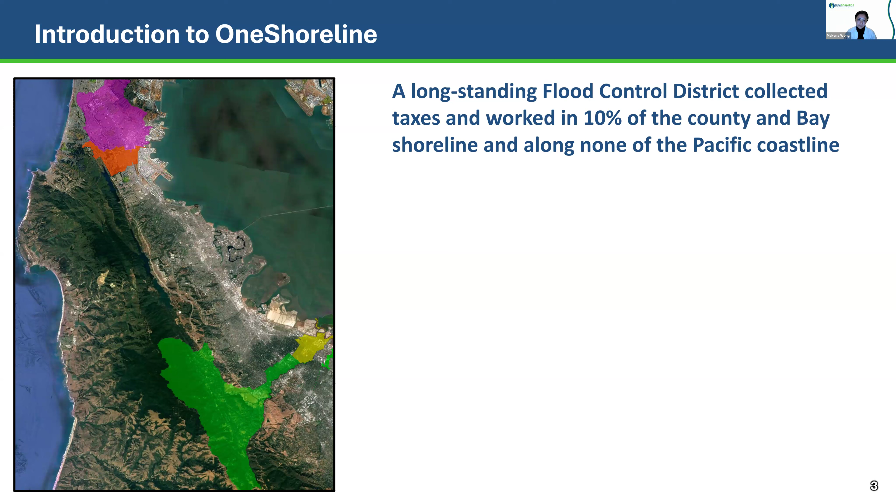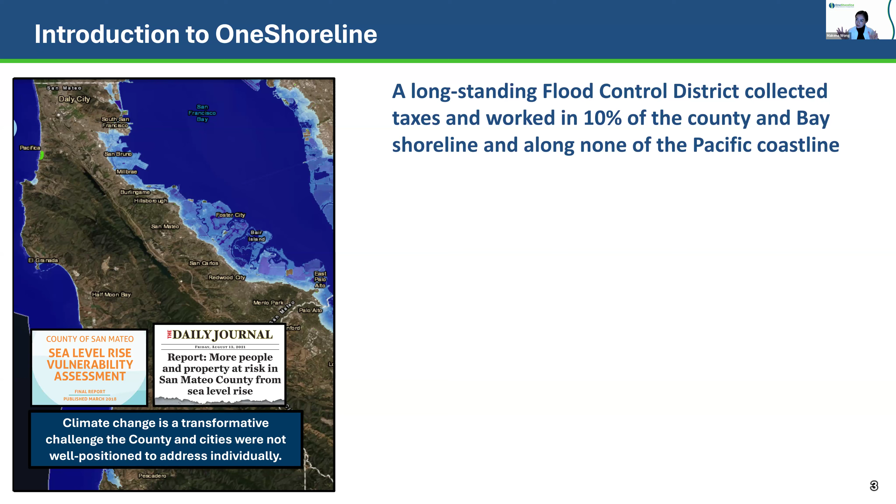When the county completed a sea level rise vulnerability assessment in 2018, findings showed that San Mateo County, being a peninsula surrounded by water on both sides, is actually the county in California most at risk from sea level rise in terms of people and property in the floodplain. It became clear that climate change was a transformative issue that the county or cities individually were not equipped to address. This led to a call to establish a special district working across jurisdictional lines to address the issue head-on. In response, state legislation established OneShoreline on January 1st, 2020.

So we are four years old, almost five, and the first independent government agency in California focused on building resilience to the water-related impacts of climate change. That's intentionally broad because we take a holistic approach in all our work. First, a holistic approach to threats: flooding and sea level rise are in our name, so we're very focused there, but also coastal erosion issues and more localized stormwater issues, especially where they intersect with regional multi-jurisdictional areas.

That leads me to the second point: we also take a holistic approach to geography.

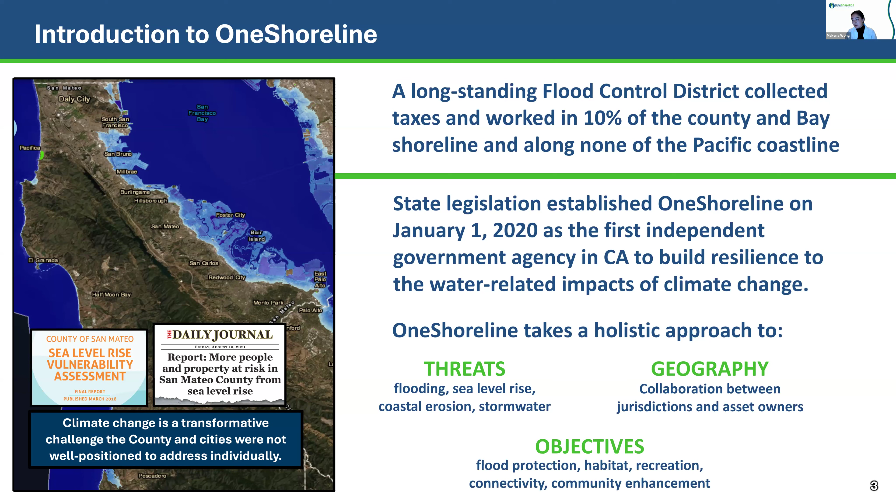This is really the heart of why OneShoreline was created: to facilitate collaboration across jurisdictional lines and with asset owners that aren't cities, counties, or towns, like SFO, the San Francisco International Airport. We also seek to take a holistic approach to our objectives.

A key focus of our work is on the San Francisco Bay shoreline of San Mateo County, given how urbanized and low-lying much of this part of the county is. We call our portfolio of projects on San Mateo County's Bay shoreline OneShoreline's Bay Program. The objective is to align and connect protection and enhancement along the entire 53 miles of the San Mateo County shoreline.

You can learn more about all of our Bay Program work on our website, but today we'll zoom in on the area just north and south of San Francisco International Airport, since the focus of our call is the orange line to the south of SFO: the Millbrae and Burlingame project.

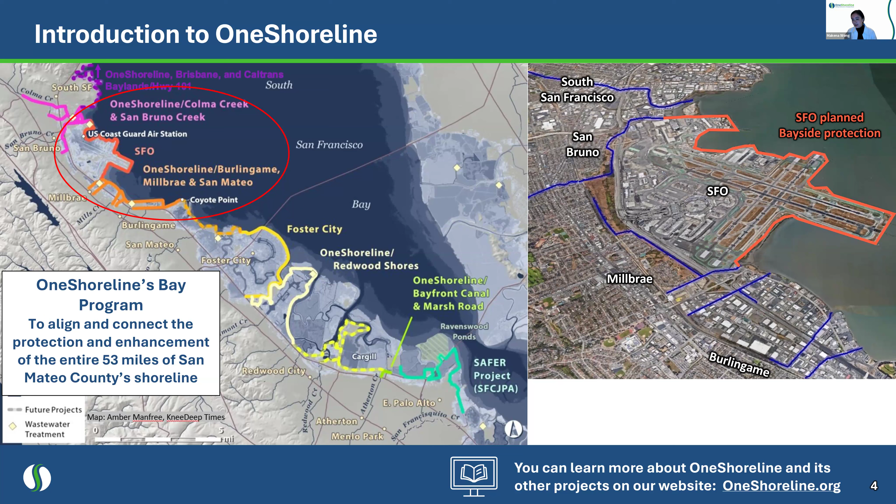San Francisco International Airport is in the process of designing its shoreline protection program along the perimeter of the airport, to protect it from the 100-year storm event, as well as 3.5 feet of sea level rise. Given the number of communities in San Mateo County just north and south of, or tucked behind, the airport, like San Bruno and Millbrae, that experience flooding today during high tides and storm events, it's been a key focus of OneShoreline to leverage SFO's project and connect to it on both sides to provide a contiguous line of protection against current and future storms with sea level rise. That orange line just to the south of SFO is the Millbrae and Burlingame Shoreline project we'll focus on today.

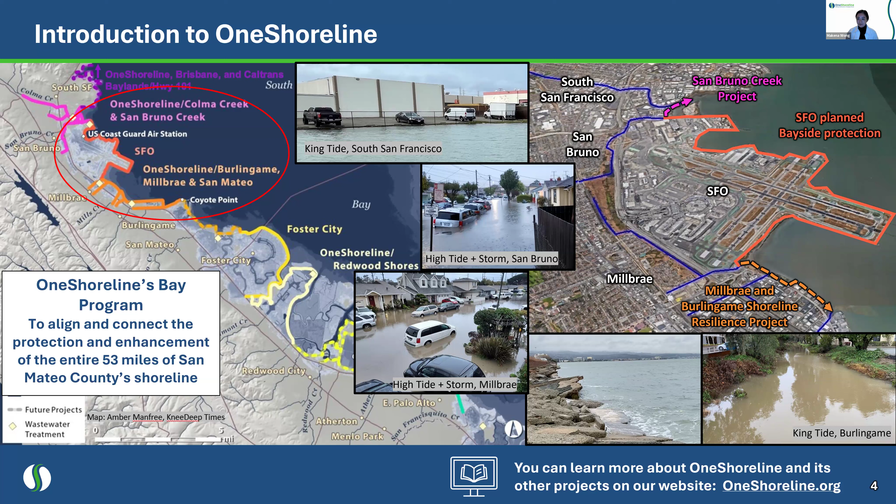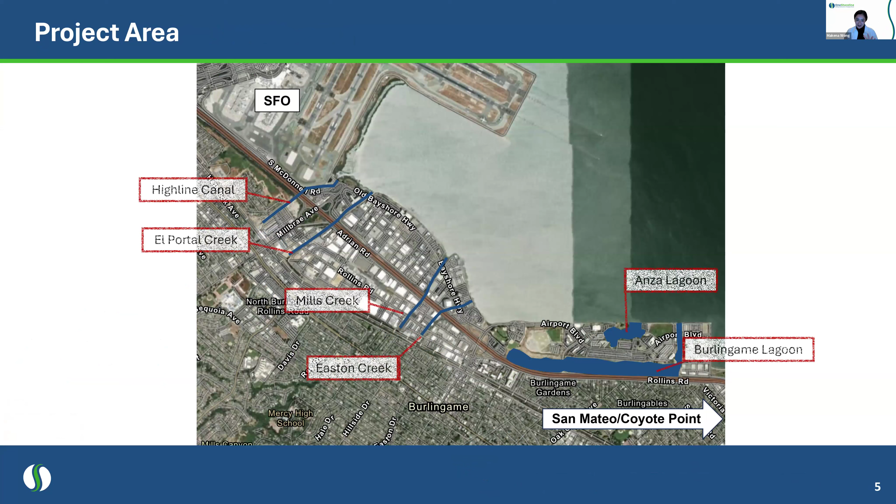Let's get oriented to the project area. Just south of SFO, you have SFO to the north and San Mateo and Coyote Point off the map to the southeast. One complicated aspect of this project area, which I'll elaborate on later, is that there are 6 openings in this shoreline that drain the area during rainfall events, but could also take on water during high tides.

We have 4 creeks: Highline Canal and El Portal Creek in the city of Millbrae, with El Portal Creek right on the border between Millbrae and Burlingame. Within Burlingame, we have Mills Creek and Easton Creek, as well as 2 lagoons, Anza Lagoon and Burlingame Lagoon.

I'll pause here to ask for your input on what your familiarity is with the project area and what brought you here today. I'll pause for you to launch that poll, Violetta.

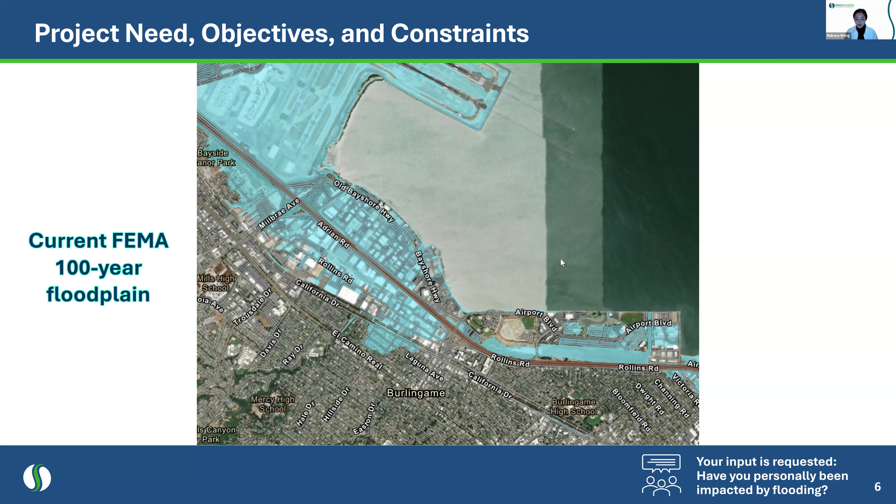Okay, let me move ahead here, layering on the sea level rise floodplain for this area. This area is incredibly vulnerable to sea level rise. Nearly this entire project area was artificial fill, land created since the 1850s or 60s, and so it's incredibly low lying and vulnerable to sea level rise.

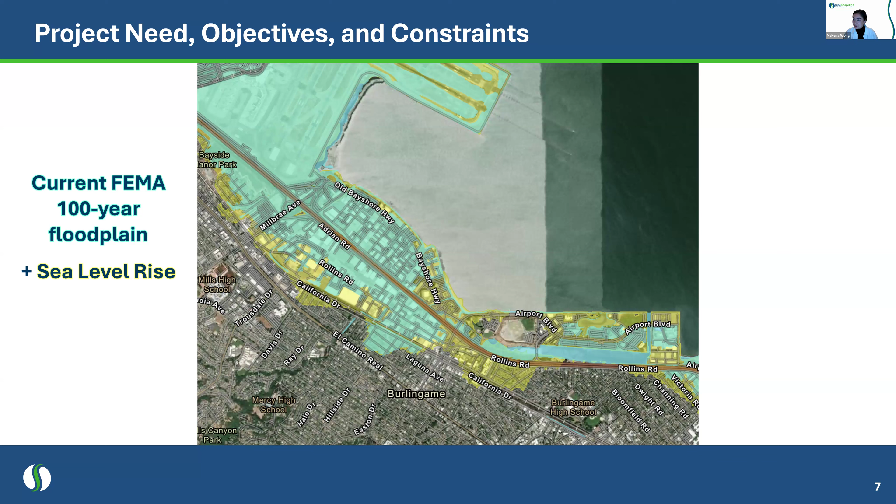Both the cities of Burlingame and Millbrae completed studies looking at this issue and actually began to scope the project that has led to this regional project today. Those two studies found that the estimated value of properties impacted in this area from sea level rise totaled nearly 2.4 billion, a significant amount of property value. And that's just looking at this through the lens of property value, which we know is not a full indication of the value of this area, both in terms of recreational value as well as ecological value.

And then finally, this area is also incredibly vulnerable to shallow groundwater rise. This is an emerging issue that OneShoreline is still getting a sense of how to incorporate into the project design, but this is also an incredible threat in the Millbrae and Burlingame shoreline area.

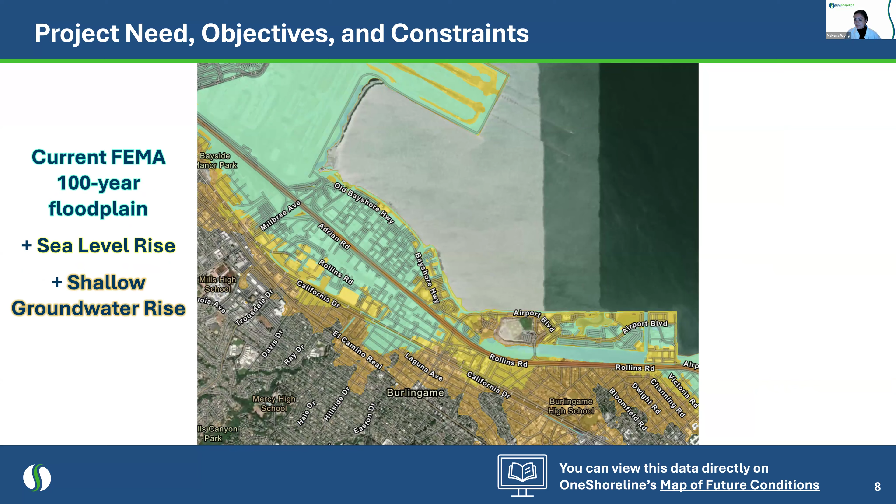So pivoting to the project objectives. The overall project goal for the Millbrae and Burlingame Shoreline Resilience Project is long-term climate resilience against sea level rise and extreme storms for developed, natural, and public access areas.

And this translates into three project objectives. First is coastal flood protection: how can we protect the shoreline area against those hazards I showed earlier, both currently occurring and also in the future?

Second is establishing a functioning habitat: how can we facilitate healthy and sustainable ecosystems along the shoreline? Based on our modeling, I'll allude to this more in future slides, we've seen that habitat features, both existing along the shoreline today and ones that could be developed as part of the project, could help us meet the coastal flood objective. Our objective overall is to maintain softer, shallower slopes that could facilitate the natural reformation of habitats that were lost in this area, and also help those habitats migrate as sea levels rise.

The really difficult and challenging thread we have to needle here is balancing this with the very close proximity this project has to SFO, making sure we are not attracting high flying birds to this area. So we'll have to figure out how to not actively create or plant new habitat that can do that, while also facilitating a healthy and sustainable ecosystem. We'll have to find that balance.

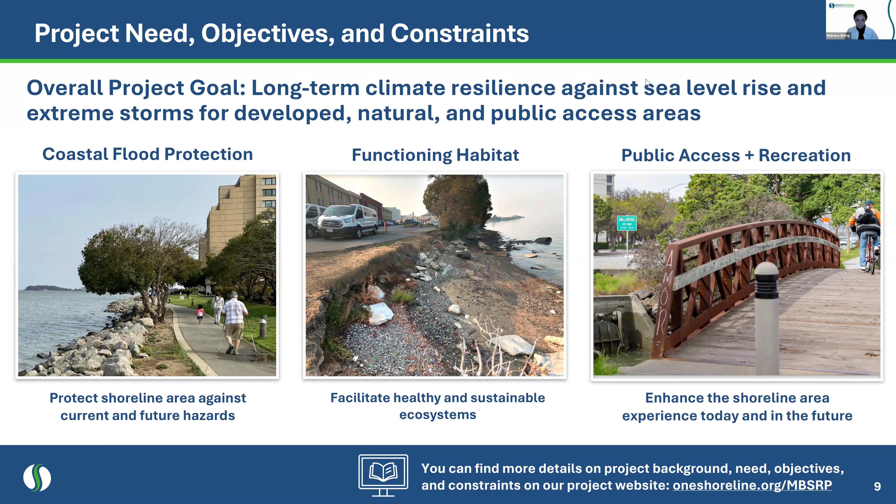Now spending some time on the very difficult project constraints for this project. So one of the first...

Difficult aspects of this area is the fact that there are 6 creeks or lagoons in this project area. We're looking, as part of this project, to elevate the entire shoreline area to protect from long-term sea level rise and flooding. But instead of just elevating that area, we also have to account for the 6 holes in the shoreline that have to remain open to allow the creeks and lagoons to drain to the bay when rain falls. And then also, when there's high tide and sea level rise, keep that water from going up the creeks and lagoons and flooding properties adjacent to them. That's been one incredibly challenging aspect of designing these different alternatives.

Second, and I emphasize this a lot in all of our workshops and the tour, this area is heavily urbanized. Early in the project, we developed this map, where we mapped how much space exactly we have to work with in the project area. We first defined what we're calling a shoreline barrier back boundary, that's the lime green line going throughout the area. That's how close can we possibly get to existing development, existing buildings, roads, and parking lots. That's how that green line was defined.

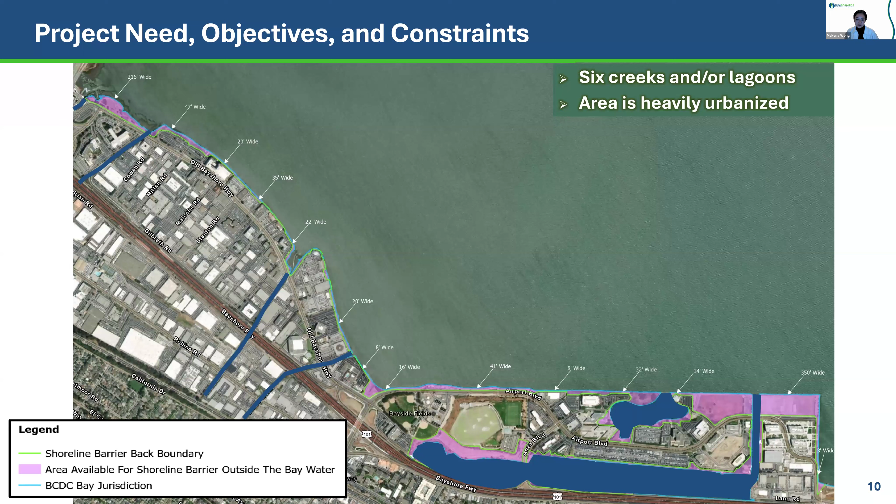And then on the bay side, we defined what's within BCDC's bay jurisdiction, essentially defined by the high tide line, how we defined the existing shoreline. The space between the green line and the blue line is shaded in purple, and that's what we mapped out as roughly what area is available. It ranges from non-existent, where existing development is actually encroaching into the shoreline without adequate buffer to build shoreline infrastructure without bay fill, to areas with more space, up to 216 feet wide in Bayfront Park in Millbrae, a really beautiful, more spacious area of the shoreline.

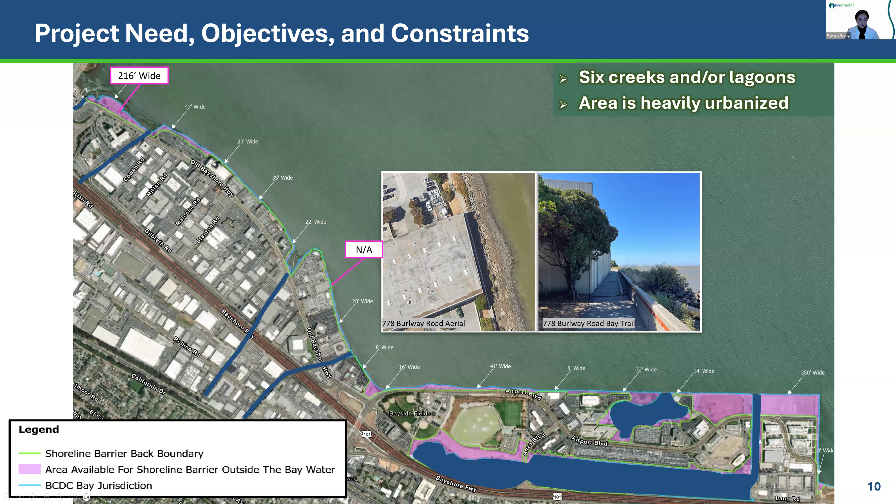I'll just acknowledge these 2 areas here are now part of new private developments, so we're not counting that as complete open space in the same way we're thinking about Bayfront Park. The main message here is that existing and recently permitted developments along the shoreline in Burlingame have significantly limited the space available for this project. That's been a huge challenge to wrestle with.

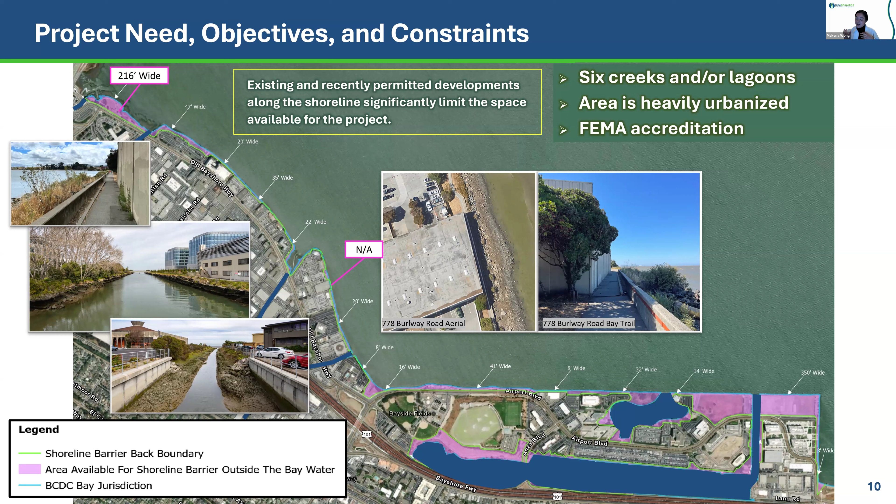Third, the project must meet requirements to be accredited by FEMA, the Federal Emergency Management Agency, so that areas on the landward side of this project are not subject to the flood insurance requirement. That's a key objective of this project, so we must incorporate coastal flood protection measures acknowledged by FEMA as part of this project. That is a constraint we need to operate around.

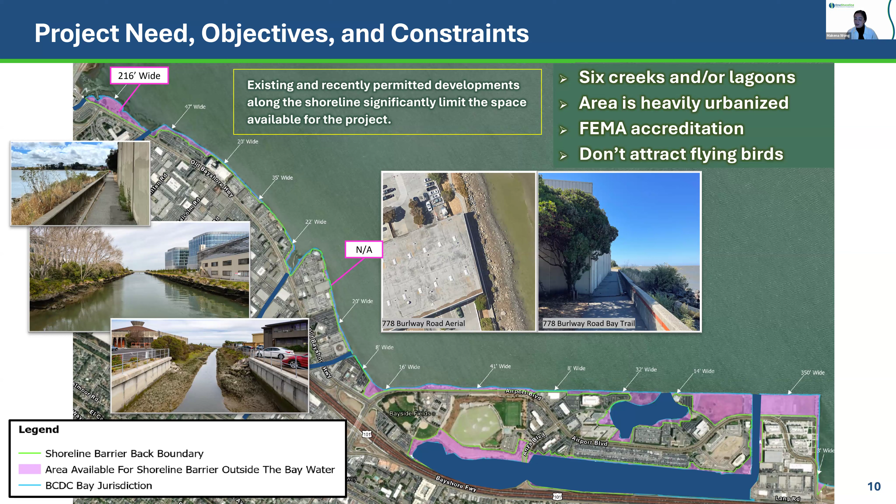And then finally, we have to be very clear that we're not attracting new high-flying birds to this area as part of this project, due to the proximity to SFO. All right, moving forward in project progress.

To date, we kicked off this effort in March 2022, where we hired Chuck and his team. Chuck's team got moving quickly from July 2022 to September 2023, collecting data on the area and developing the first set of project alternatives. All of that culminated in a feasibility analysis report that analyzed the first set of conceptual alternatives, leading to the release of a notice of preparation that initiated the CEQA process for the project in October 2023. That notice of preparation included the image shown at the bottom of the screen, illustrating 2 types of features of the project, both offshore and onshore.

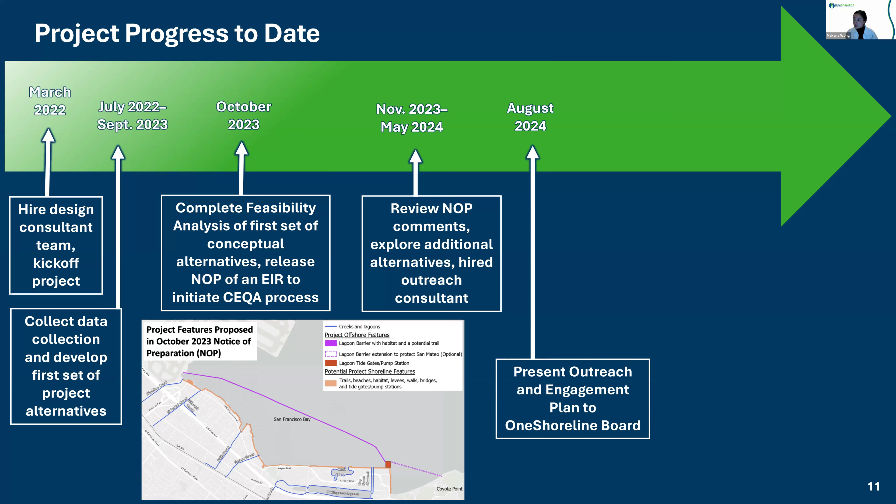We received significant comments on the notice of preparation that were very informative and instructive to the project. Following the NOP release, from November 2023 to this past May 2024, we reviewed those comments in detail, explored additional alternatives as a result, and hired an outreach consultant, Civic Edge, that's supporting us on this webinar today. Civic Edge and One Shoreline worked together to develop an outreach and engagement plan for this project, which was presented to our board in August of 2024.

We're moving into this fall where, in early fall, we're vetting this updated set of draft alternatives that replaced the more broad alternatives included in the notice of preparation with city partners, landowners, and permitting agencies. We're now concluding this public engagement period on these updated draft alternatives. We'll move ahead into 2025, taking in all of your comments this fall, looking to establish what we're calling the least environmentally damaging practicable alternative, or the preferred project, out of these three alternatives.

The last time this project was publicly discussed was through the notice of preparation. I want to share a bit about what we heard in the NOP comments and how we've responded to those as part of these three draft alternatives.

First, we heard that a large offshore lagoon, shown in that image with the purple line and offshore features, could impact water quality, including changing circulation, increasing pollutants, turbidity, temperature, salinity issues, as well as increasing the risk of algal blooms.

Second, a large offshore lagoon, as shown in the NOP, could impact specific species and their habitats, and we heard very clearly from various commenters that nature-based solutions were a top priority. Third, a large offshore lagoon could attract wildlife, including high-flying birds, at the risk of bird strikes to SFO.

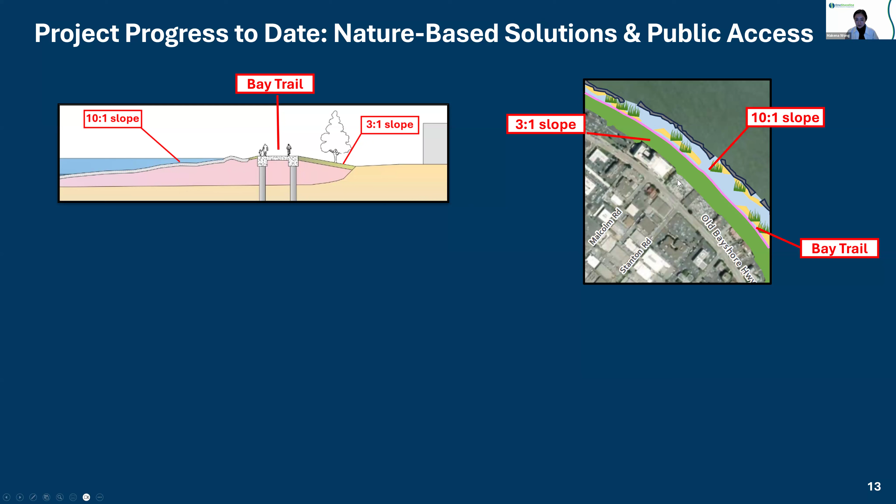The reason we incorporated these nature-based solutions into all the alternatives is we found that a gradually sloped living shoreline provides two key benefits. First, shoreline elevations could actually be lower when you have that flatter, gradual slope ahead of the bay trail. We don't have to build as high to protect from sea level rise when you have that more gradual slope on the bay side.

It's also just a more appealing, attractive experience for both people and wildlife — a less abrupt transition from land to bay along this reach of the shoreline.

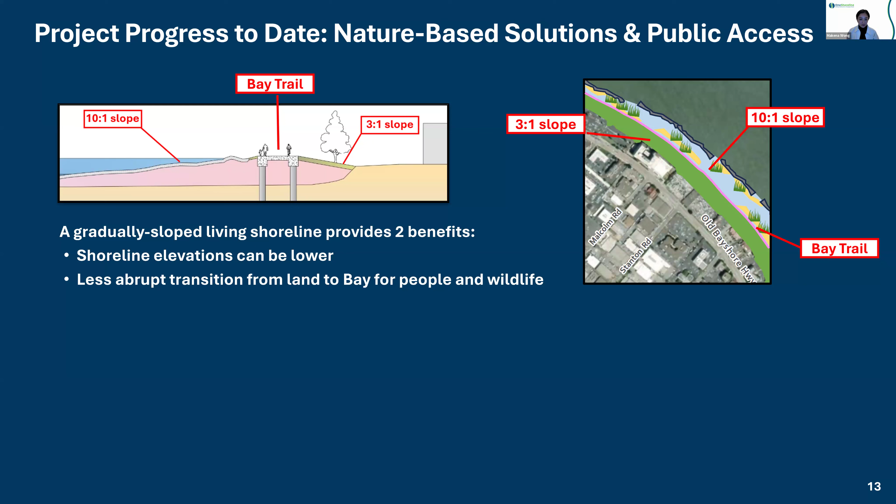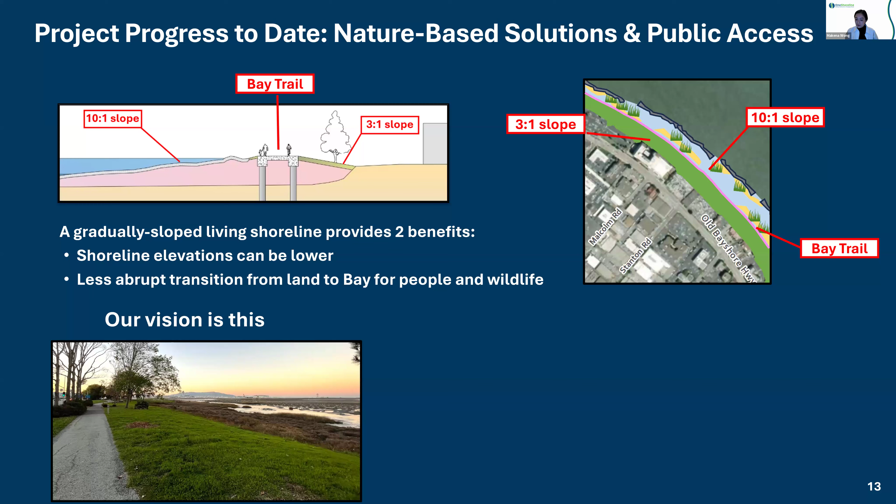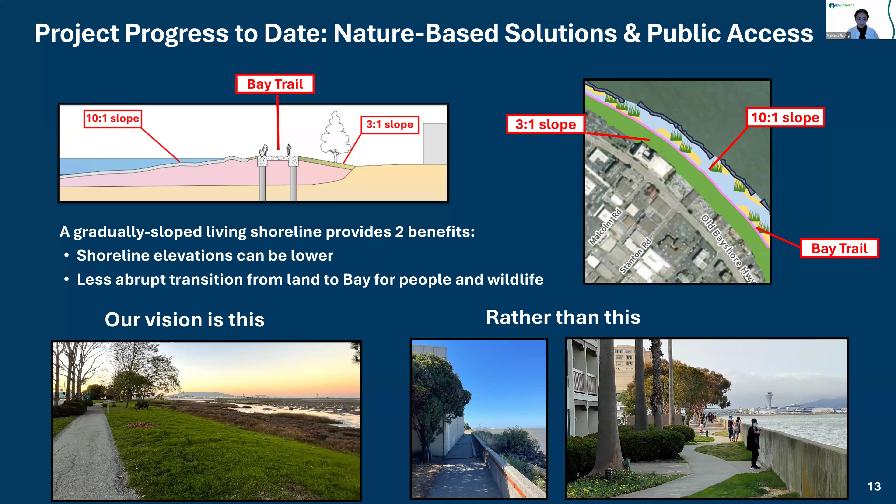Our vision for this project is something like this — the way Bayfront Park looks today, with that softer, gradual slope down to the bay — rather than something like this, which is what you see in certain reaches of the Burlingame shoreline, where you have a seawall you can peer over today, but if we elevated that seawall to protect from sea level rise, you wouldn't be able to see over it any longer. We don't want to be building a fortress as part of this project. We want something more accessible, where you're still able to experience the bay.

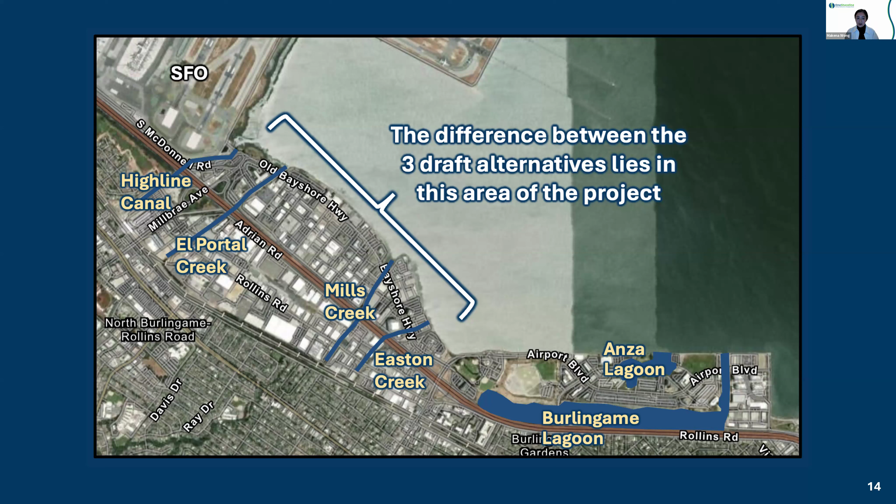I'm finally transitioning into the three draft alternatives. I want to focus your attention on the first two reaches of the alternatives. There are five reaches along this shoreline, but the primary difference between these three alternatives lies in the area of the project in the first two reaches, which cover the four creeks along the project area.

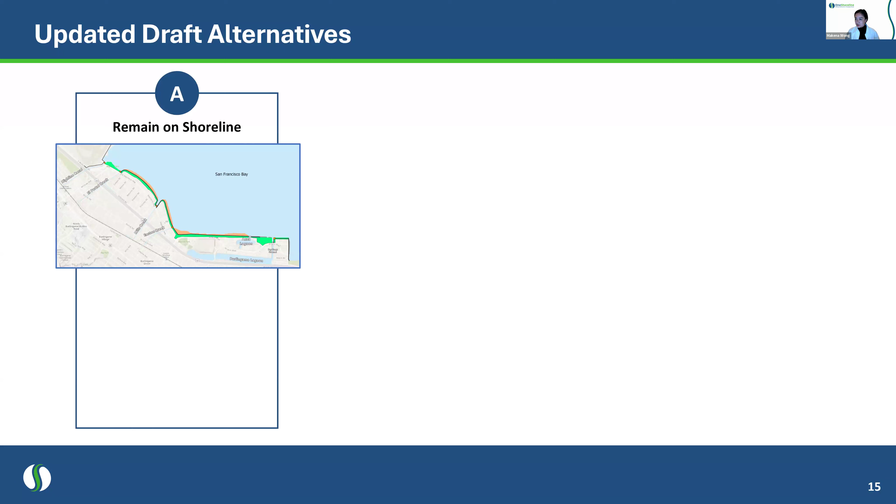Going into the 3 alternatives, first we have alternative A, and the focus of this alternative is to remain on the shoreline as much as possible. So the way we do that, focusing on the area around the 4 creeks, is by managing creek water at each creek mouth with a pump station and a tide gate at the mouth of each of those 4 creeks.

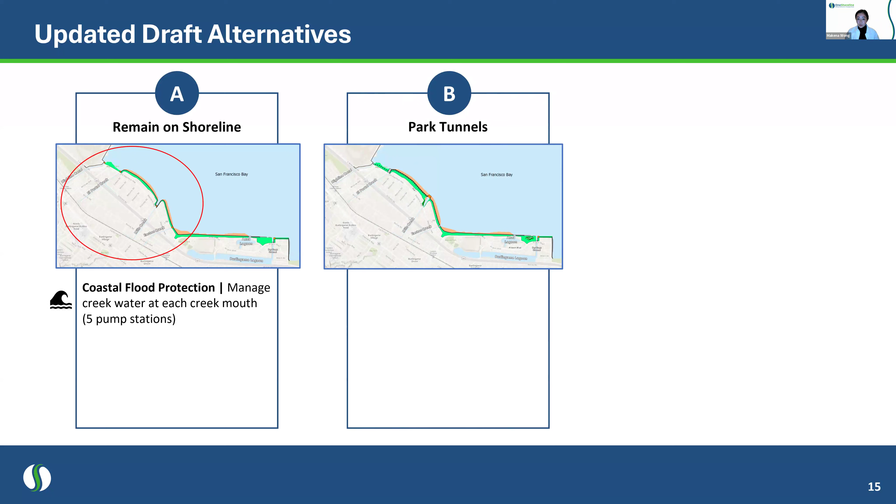Alternative B consolidates those pump stations to 2 by managing creek water through a series of tunnels that route that creek water to 1 location. So we're able to minimize the number of pump stations in alternative B.

Alternative C does the same thing by consolidating pump stations, but through a nearshore waterway. It manages creek water exiting these 4 creeks through a waterway that routes it to 1 location where it's pumped. Just to summarize the key advantages and disadvantages of each alternative before we jump into them, and I'll summarize this again at the end.

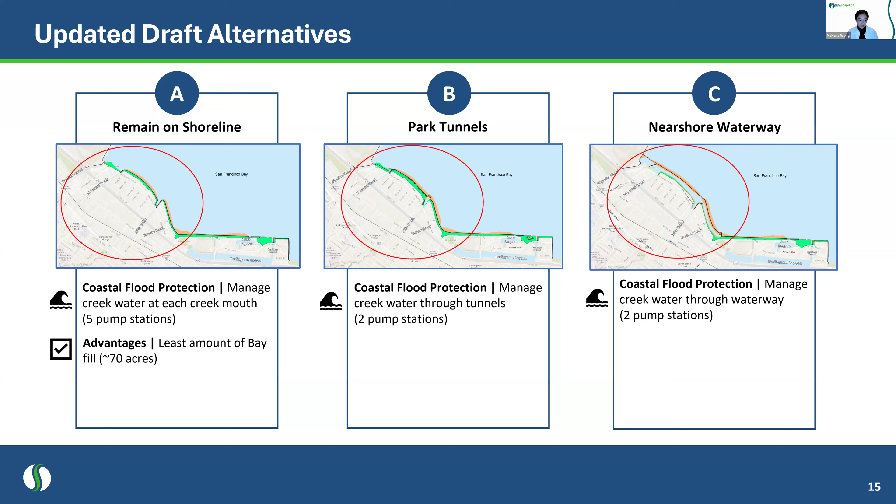So once again, alternative A, the focus here is to remain on the shoreline as much as possible. As a result, the key advantage is that it has the least amount of bay fill, about 70 acres. Some disadvantages: it has the most number of pump stations, which are expensive and can be very energy intensive, especially as sea levels rise. That pumping will start to become more frequent and perpetual.

Alternative B: some key advantages, it reduces the number of pump stations, consolidating that water to 1 location through tunnels under a new shoreline park. There's also a significant increase in shoreline park space because those tunnels are underneath new park area. Some key disadvantages: constructing tunnels in the shoreline area would be incredibly challenging, both to construct and to maintain over time.

Key advantages of alternative C: once again, you're reducing the number of pump stations, I'll speak to this a little later. There's an opportunity to restore fish passage to Highline Canal and El Portal Creek as a result of this alternative. And because you're creating this new reach of shoreline protection with the nearshore waterway, there could be an opportunity to create a new reach of the Bay Trail.

Some key disadvantages: it has the most amount of bay fill, about 120 acres. It could impact views at Bayfront Park and Millbrae. And some of those water quality concerns that we heard in the notice of preparation could also carry forward here, where we would have to deal with water quality impacts as part of this alternative.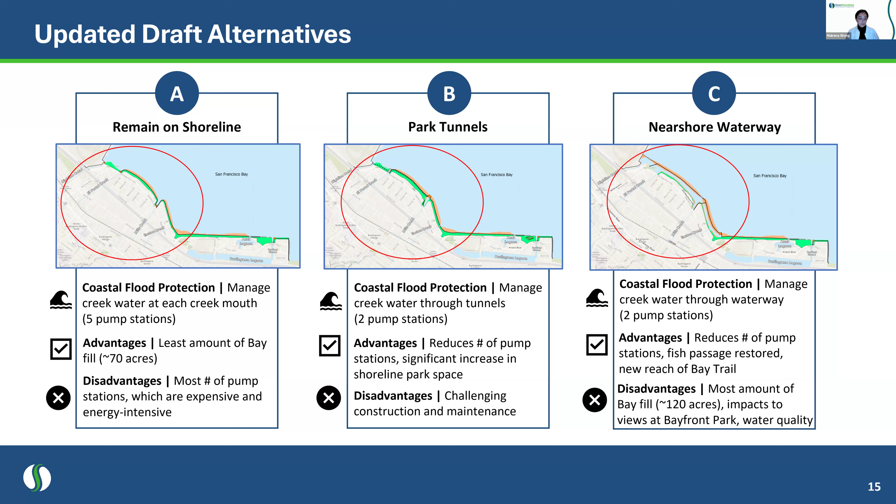So just to be clear, we do not have a preferred alternative at this time. Feedback that we hear from you in this webinar, and feedback that we've heard in many other events this fall, are directly informing changes that will be made to these draft alternatives and the process we will go through to ultimately select a preferred alternative.

Okay, so let's dive into alternative A. So all these alternatives... yeah, sorry, we have a question that is relevant to all the explanations. Could you describe what a pump station is designed to accomplish? Pump out water that has already come in and flooded vulnerable areas?

That's a good question, maybe Chuck you can tag team me on this. But the key purpose of the pump stations you'll see throughout the alternatives is to allow for water, when rain is falling and draining into these creeks, to get into the bay. So that's the main purpose: to take water from the creeks and lagoon areas and get that water into San Francisco Bay during high tide. If that water can't naturally drain by gravity, it would need to be pumped. Is there anything you want to add to that, Chuck? No, it's a great explanation.

If there's a follow-up question, we could take it real quick. The follow-up: do they only operate when flooding takes place? It sounds like no, they operate at high tides. Well, they would operate when there's a high tide and when there's stormwater runoff into the creeks, enough water to need to pump. And it happens, there's a clear sunny day, high tide - if there's no runoff in the creek at all, then they would not be triggered.

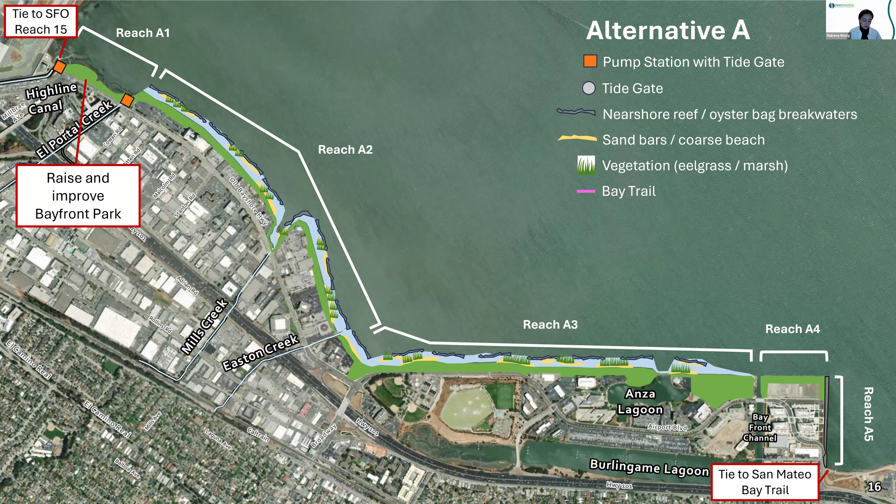Alternative A is proposing a pump station and a tide gate at the mouth of every creek. Pump stations would be constructed at the mouths of Highline and El Portal Creek. Both of these creeks have existing tide gates, and this alternative would leverage those existing tide gates along with new pump stations.

Along reaches A2 and A3, we're proposing a gradual slope to facilitate the creation of a living shoreline. A living shoreline could include nearshore reefs or oyster bag breakwaters, shown by the gray squiggly cartoons. This could create quieter nearshore intertidal areas for sediments to accumulate and potentially form coarse beaches consisting of sand, shell, gravel, or cobble, or clustered sandbar formations, shown by the beige cartoon areas.

The nearshore reefs would also provide places for oysters and other invertebrates to attach, as well as habitat for fish. I'm also showing cartoon vegetation throughout the living shoreline area. We wouldn't be planting vegetation as part of these alternatives, but it may occur due to the more gradual, softer conditions of the living shoreline.

At the mouths of Mills and Easton Creek, pump stations with tide gates would be constructed as well. This gray circle illustrates a tide gate without a pump station, where the existing stacked rubble outlet currently at the mouth of Anza Lagoon would be replaced by a tide gate, allowing us to control water levels within Anza Lagoon.

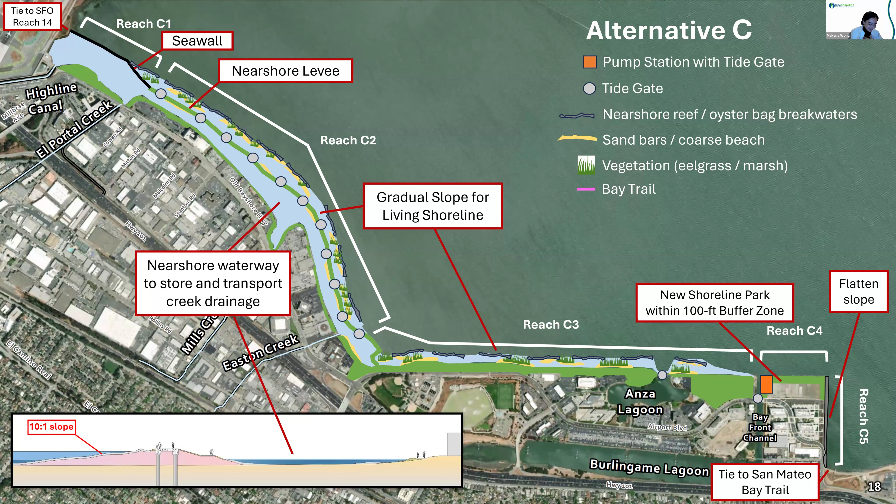Along Reach C2, that wall would transition to a nearshore levee with that same gradual slope that could host a living shoreline. The wall and the levee would create a 200-foot wide nearshore waterway controlled by a set of operable tide gates. Outside of extreme storms and tides, the operable gates would be kept open to allow for normal tidal action in and out of the waterway, and to allow for natural drainage from the four creeks out into the bay.

But as sea levels rise in the coming years, these gates will need to be closed more frequently and for longer periods of time. We're estimating, just at this conceptual level, that with about 3.5 feet of sea level rise, these tide gates could remain open for up to 15 hours a day, or about 60% of the time when there's not a significant storm event. The waterway would terminate at this nearshore pump station, which would be activated during periods of high tide that occur during a storm event.

Finally, in terms of public access, as I mentioned earlier, this nearshore levee provides the opportunity to host a new reach of the Bay Trail along that levee. That new reach would terminate at a pedestrian bridge taking pedestrians back to Bayfront Park and the existing shoreline in Millbrae, rather than allowing access along the seawall to SFO property. That's why there's a transition from a nearshore levee with a wider footprint and trail to something more structural.

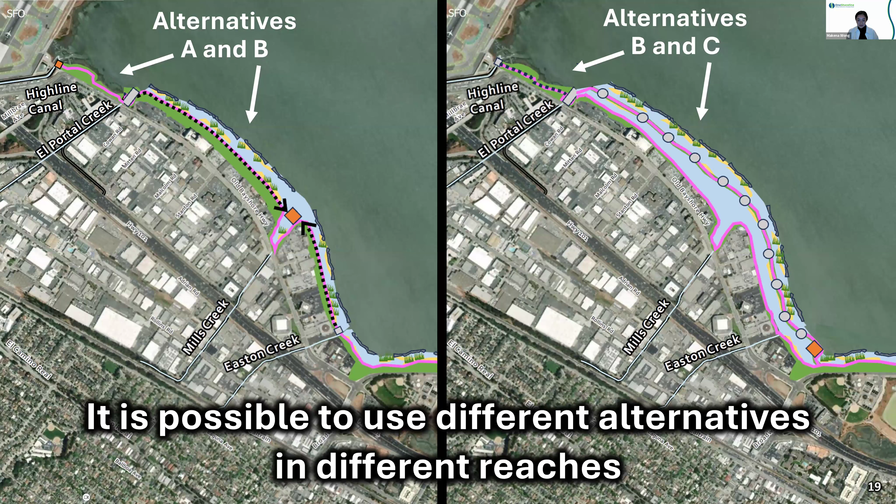So just to summarize one last time: Alternative A remains on the shoreline as much as possible through tide gates and pump stations at the mouths of each of the 4 creeks. Alternative B consolidates to two pump stations using a series of park tunnels underneath a new reach of Shoreline Park. Alternative C consolidates to two pump stations using a nearshore waterway. Some advantages: Alternative A has the least amount of bay fill, Alternative C has the most. Alternative B has some disadvantages in terms of construction and maintenance of those tunnels, which could be very complicated.

Finally, in terms of Alternative C, there are benefits in restoring fish passage to those 2 creeks in Millbrae, as well as a new reach of Bay Trail. There are a lot of trade-offs between these alternatives, and once again, we don't have a preferred alternative at this time.

So I will pause here to seek your input. We'll have a series of polling questions for you to get your initial thoughts and reactions on these 3 alternatives.

Thanks, McKenna. The first question is regarding the habitat impacts and benefits from the 3 alternatives. I'll read it out loud: all 3 alternatives include living shorelines, which will allow habitat to adapt as sea levels rise. How well do you think these alternatives meet the goal of facilitating healthy and sustainable ecosystems? Again, these are just pulse checks—we want to hear your feedback. There'll be time for more discussion once the presentation is over.

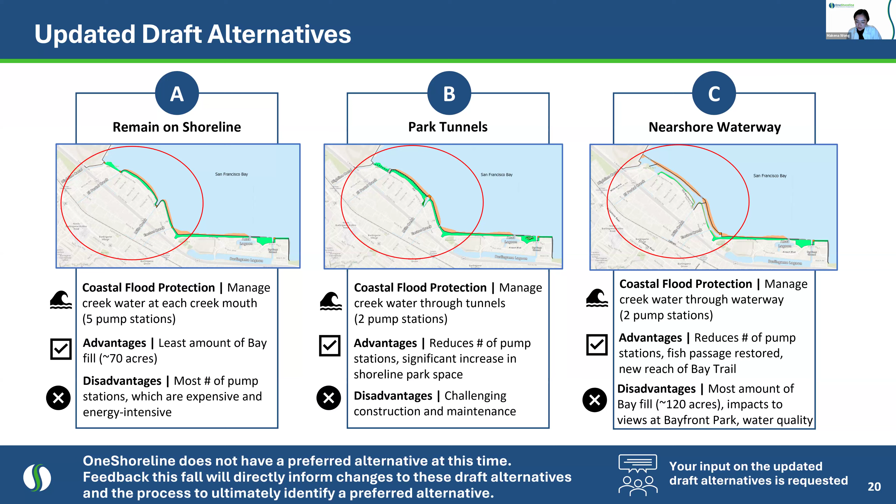So here's the results from that: a couple people for A, a couple people for B. Some people don't feel like they have enough information, and others don't prefer one over the other at this point.

Okay, one more here. All three alternatives include improvements to public access and recreation. What is your top priority related to public access and recreation? There are a couple of choices: expanding the Bay Trail width to allow for multiple uses, providing new opportunities for recreation like new segments of the Bay Trail, preserving existing uses like fishing and plane spotting that happen currently, adding additional uses, all of the above, or something else.

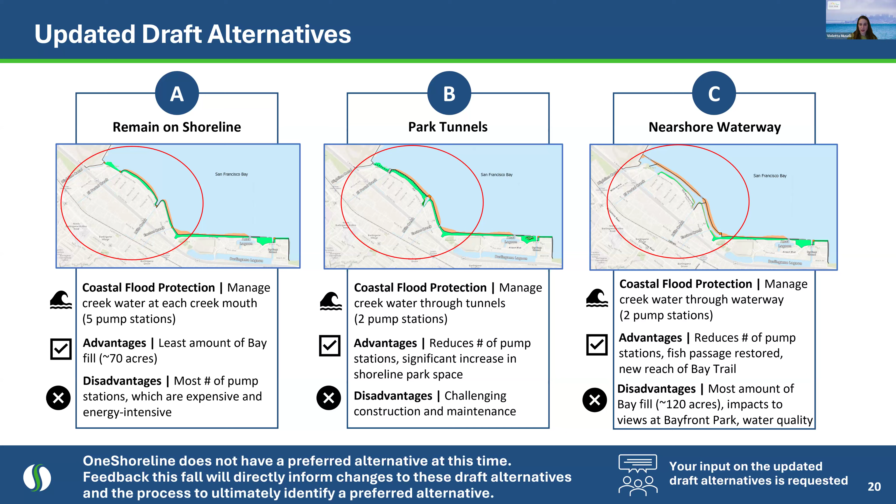All right, closing this out. I know I'm just over 30 minutes here, but we're near the end. Finally, we're looking for your input on some draft criteria that we plan to use to compare the alternatives to each other and ultimately select a preferred project alternative.

The first set of criteria really speak to the three project objectives I mentioned earlier. Flood protection: does the alternative provide the required flood protection benefits? Does it allow local stormwater to drain properly? Habitat: does it harm or benefit current and future species?

Public access and recreation: what does the alternative look like? How do you experience it when you're along the shoreline? And then some other criteria related to implementation: how an alternative will be implemented.

Is it feasible to obtain the land rights and permits necessary to implement? What is the cost of the alternative, and schedule of implementation? Operations and maintenance: how will the alternative be operated and maintained both today, post-construction, and also as sea levels rise and storms become more extreme?

And then a key criteria we're weighing is related to bird strikes and SFO, like I mentioned before, determining in detail what the alternative does in terms of increasing the likelihood for bird strikes. We would like your input on this as well.

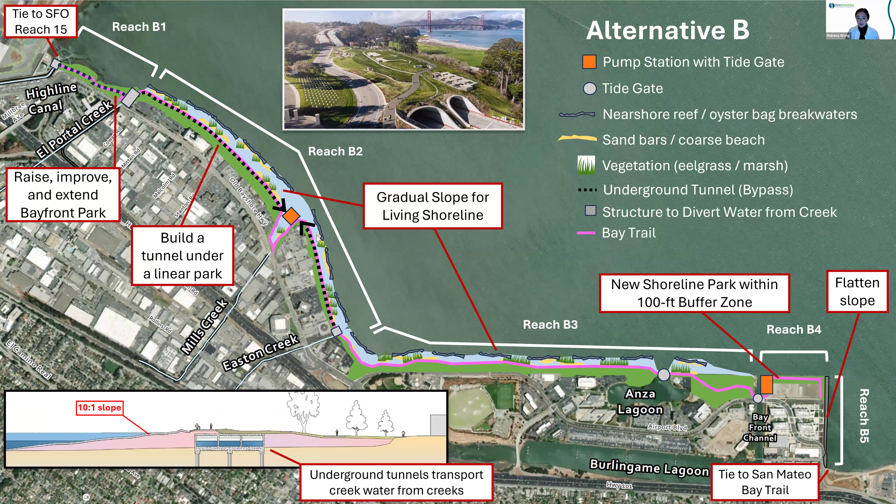Alternative B, that water will start to back up in these tunnels first before it reaches the creek channels, so that's what Chuck means by additional storage. It's limited, but it's some space. Then for alternative C, that water is going to start backing up in this near-shore waterway first, before the backup goes down the creek channels. So that's what Chuck means by additional storage.